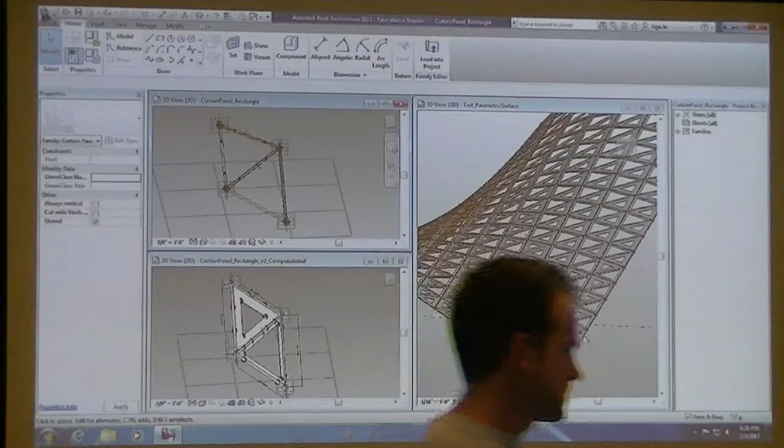The dots that we placed on one of the triangles. Jeremy, that was it. It's working.

That's always the case - if you get any kind of error, it has to do with the snap. I thought I had more balls there. Yeah, that one was 64 is what I can get to.

Did you get it then? Cool, change some, right, it looks cool. And there's 6 of them. How do you change the grid spacing for it to work? I didn't know that - you can just select it and do it.

Yeah, some of them occasionally. Honestly, my no-cuts issue, maybe that was it. Some of these curves are really tight too, so that might be an issue. I might try to do more segments on it, so they're smaller, so we can follow the curve a little bit better.

It's perfection, this is what I'm doing. This is my thesis right there. But you guys are working on a lot of those. Yeah, it works, this one is.

Yeah, you see that? I'm lovely, yeah it is. I don't feel like I'm being any more weird than usual. Ben, am I being any more strange than I normally am? He shook his head no. Maybe I'm just in a funky mood today. Figure it out, totally different.

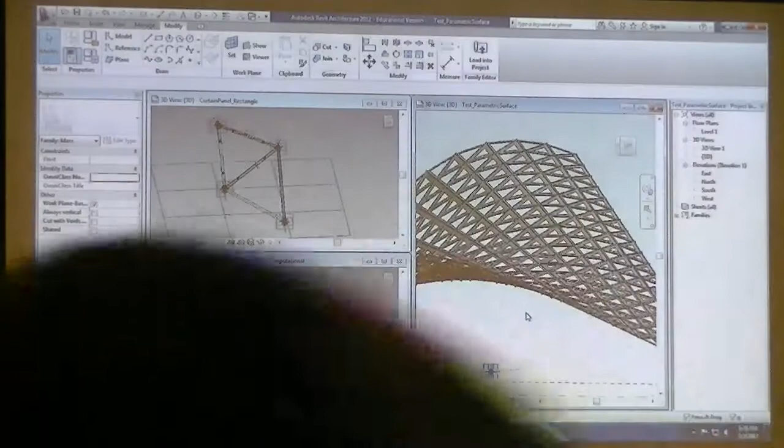That's just the reaction I want. Thank you, Ben.

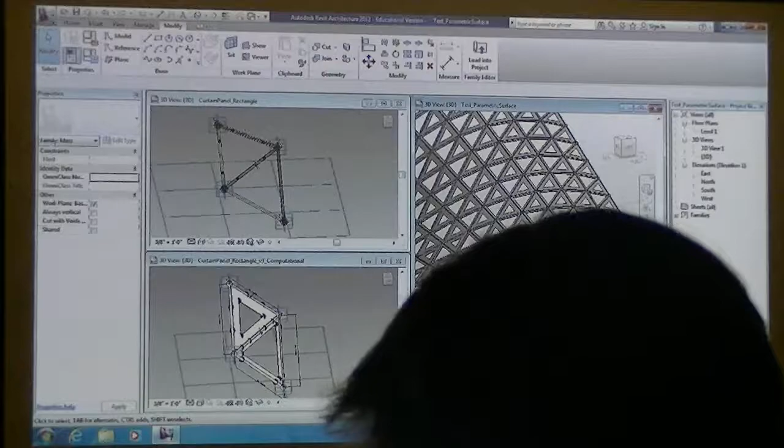Yeah, you want to drag this off to the side so you can see it a little bit better. I'm used to my computer. So, was it this good? Oh yeah, we had that bigger - that's why I can't see it. There we go, you got it right there. Okay, just making sure it's on.

Okay, so today we're going to continue where we left off. Last time we were working on the diagrid - that's basically our rectangle with the intersecting diagonal, and then we've got these 2 triangular pieces. What we're going to be doing is continuing the idea of how to create an offset, and then actually applying some voids into this form.

Eventually, we may not get to it today, but definitely next class we'll get into how within our parameters and formulas, we can actually impose some conditional statements, such as if something's true, do this particular calculation, if it's false, then return some other number.

So if you look at this surface off to the right, I've got a lot of variation in it - maybe not as much as I'd like at this moment, but not every panel is exactly the same. Every single panel is changing depending on a conditional statement and then a particular formula. So for now, I'm going to close out of those guys.

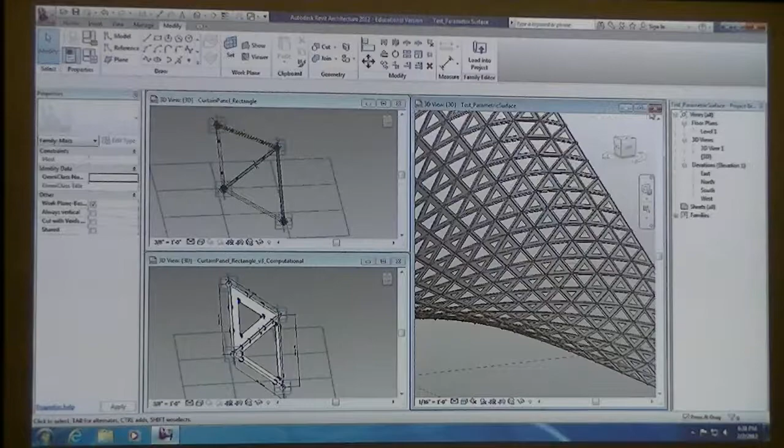We want to make sure we're in our form where we left off. You'll notice that when you loaded your component back up, like with your homework assignment, we hid a bunch of items at the very end to place these dots and get them to move up and down. But when you exit out and load your file back up, everything shows up again.

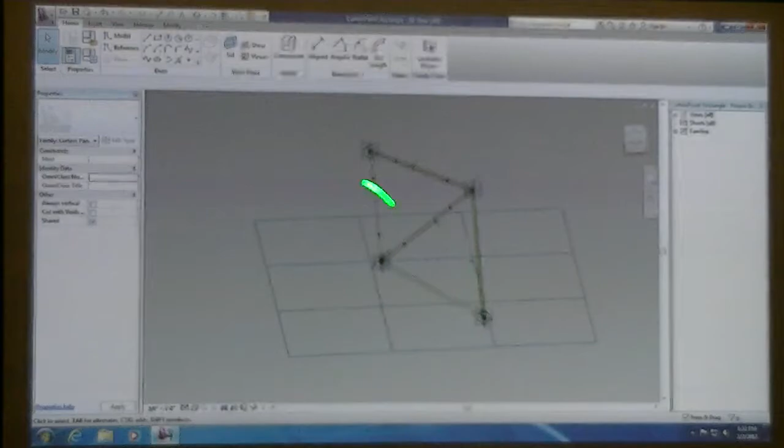That's because we were using just temporary hides, using the sunglasses down below. When we get into the project environment, which we'll be getting into next week, we can do permanent hides. But when you're working in a family environment, everything's going to be temporary, which means when you exit out, everything will come back to view when you load it back up.

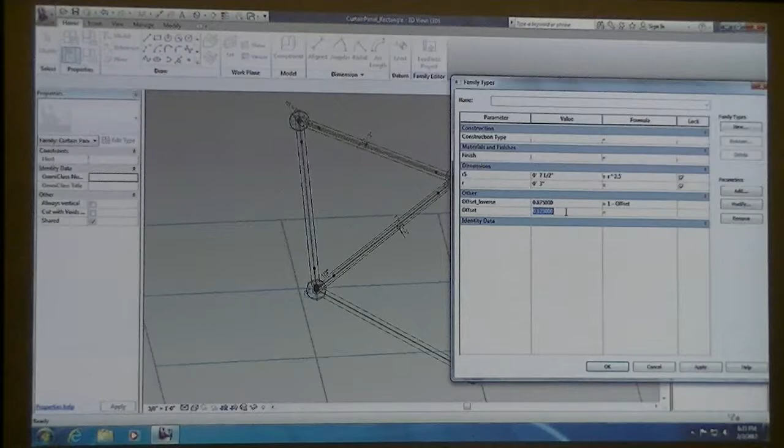You should have an element that looks like this. You've got your pipe rails, and then our spheres on each of the corners. The last thing we were doing is we had parameters set for an offset and offset inverse that had to deal with the normalized position of all of these points. So if I change my offset from right now 0.25 to 0.125, all of the points should move towards the end. Does everyone have that? Doesn't matter what the form or whatever your value is, just as long as your points are moving.

What we're going to do right now is select everything and select your filter. Once this filter dialog box comes up, I'm going to hit the button that says check none. And then I'm going to go back and check. I want to see adaptive points, dimensions, reference lines, and reference points. And hit apply and OK.

Once you have that, basically you've only selected those items. I'm going to go down to the temporary hide and isolate, and I'm going to select isolate element. So basically all we're looking at again is our reference lines and our points.

Everyone, where do we find the filter thing again? If you select everything, you get the filter button that pops up. The filter is for selection purposes only. So it's basically saying, this is all the items in the category that you've selected. And now you can deselect, or I always like to just do check none and then selectively add the items I want to see. I need adaptive points, dimensions, reference lines, and points.

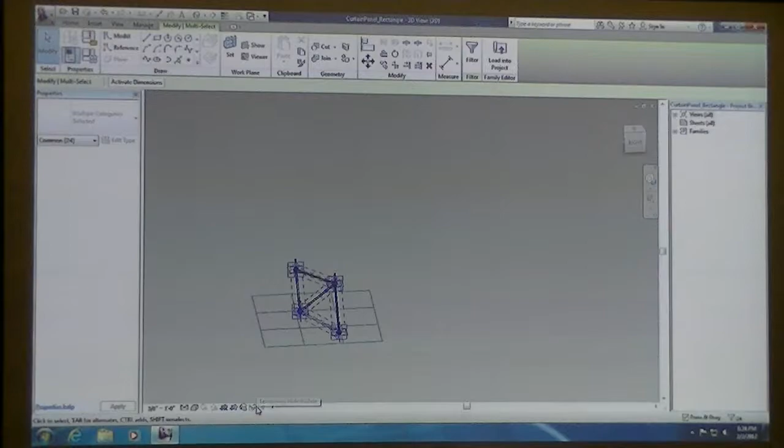Once you exit out of that, you do your temporary hide isolate, and I want to isolate the elements, so that basically I'm getting rid of all the other items I haven't selected.

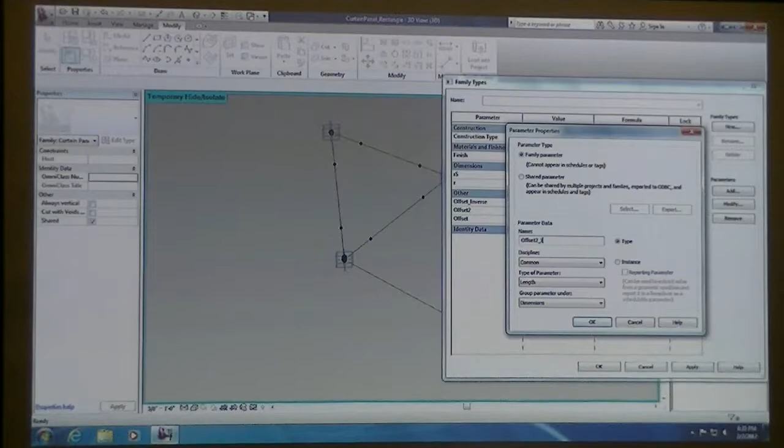What I'd like to do is on the next triangle, so we've got this top piece, down below we're going to add another set of points that are going to be equal to another offset, because I eventually want these two offsets to be different. So add a parameter called offset 2, and remember it needs to be a number. And then again we'll need an offset 2 inverse, and that will have to be a number as well.

You can by default just set the offset to some number like 0.4. You want it to be a little bit different than the original offset. And our offset 2 inverse needs to have the same formula, the 1 minus, but this time it'll be offset 2.

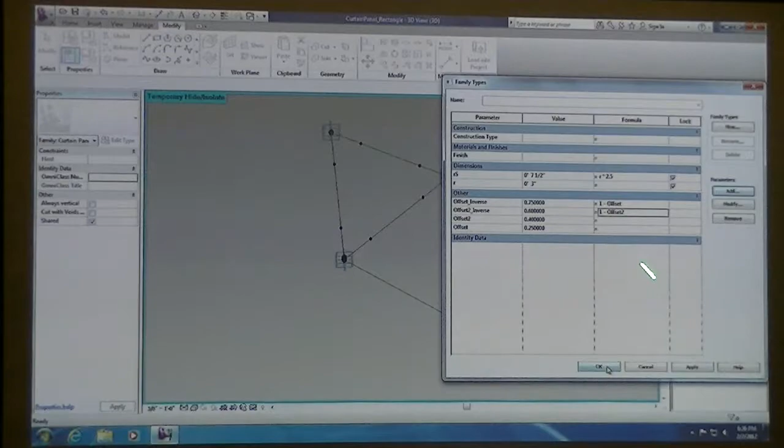Everyone got that? We're getting there? Okay.

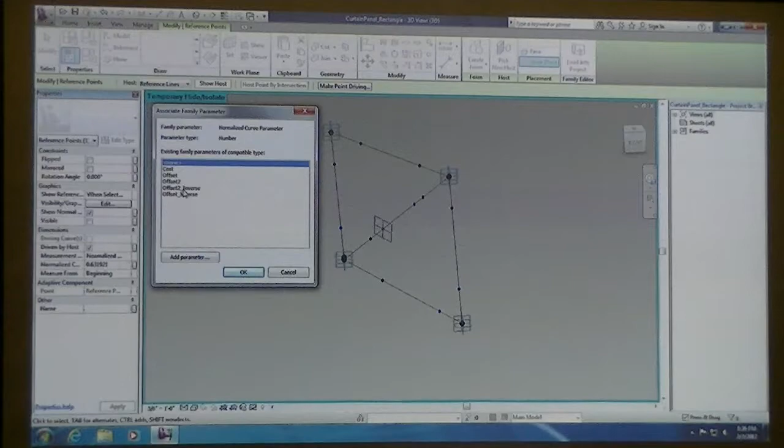Now I'm going to select my point element, and again, I just need 2 points around each of these corner adaptive points. Then when you select one of those points, look at your normalized curve parameter and associate it with the new offsets that we just created. So in this case, this one's greater than 0.5, so that's going to be my offset inverse. This other one should be the offset because it's less than 0.5. Again, do that for each of your points that you just placed.

While you guys are catching up, I'm going to do a save as. Just call this... Every time you do something good, you want to hit save.

Let me know if you guys are there or not.

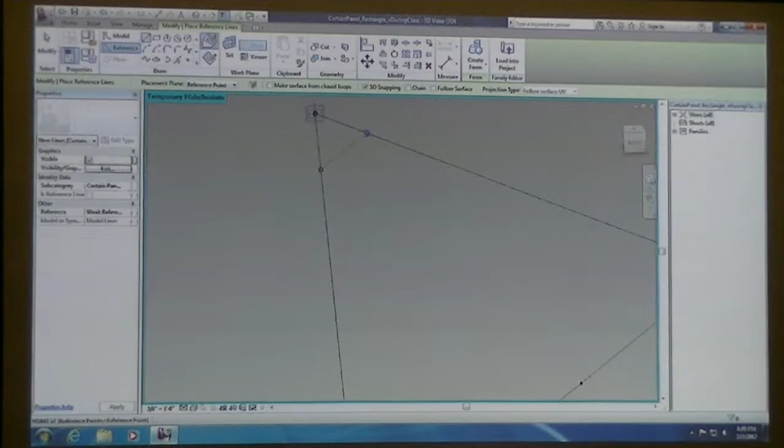Essentially, each of these points that are near the end, we want to snap and draw a line to each one of them. So I've got that corner, I'll do the same thing. You want to make sure you're snapping to the points that are associated with the offsets, and then the ones associated with offset 2. I'm going to do that on both triangles, and make sure you're getting that point snap.

So you should have this web that looks like this. You might get an error on one that says the line is slightly off axis. Don't worry about it, hit okay. Basically that means you're slightly off orthogonal, and it's just warning you. I don't know why it gives you that warning.

That's highlighting a plane when I'm trying to connect the points, like it's not allowing me to snap. Do you have your 3D snapping on? That's what it is, yep. You should have two.

So if you've been able to get that to snap together, go ahead and test it out by loading up your parameters again and changing the numbers and hitting apply. Make sure that your points and your lines are moving up and down the triangle, and I'm always keeping them slightly offset from one another.

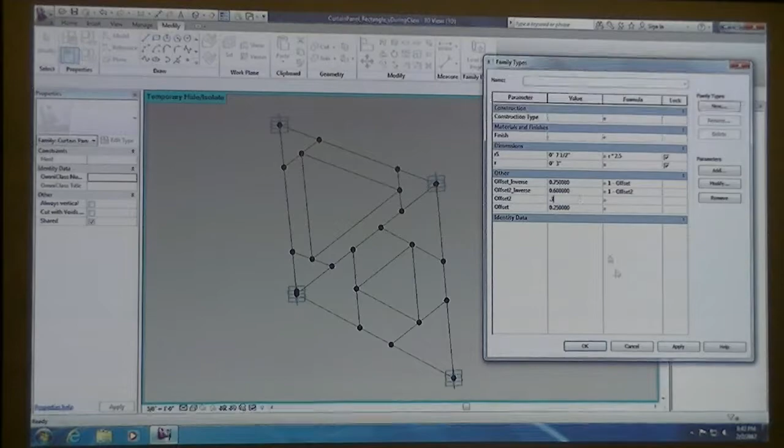And again, if you've done that, go ahead and test out to make sure that your inscribed triangle adjusts with the change of the offset parameters. Everyone got that?

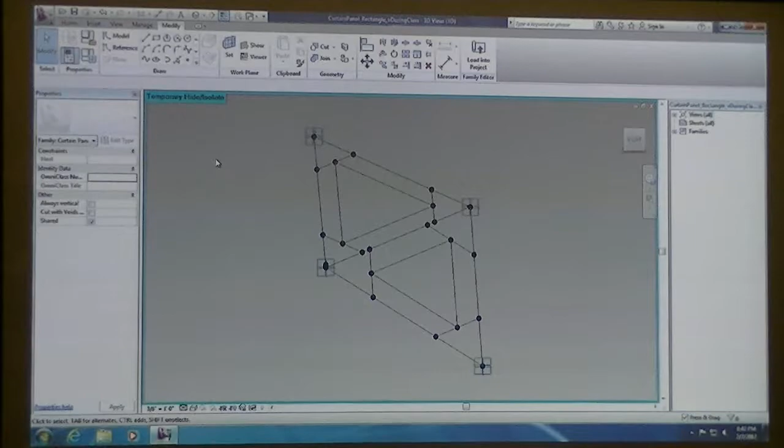Now what we're basically doing is creating a solid surface out of each of the triangles and then cutting a hole through it. Since we have all these reference lines, our void hole will actually adjust depending on our offset.

But there's a couple different tricks that we need to do for when we start working with voids. We always have to ensure that our void is going to cut through the solid. One thing I'm going to do is create a couple different parameters here. One's going to be called thickness, which will be the thickness of the actual solid surface.

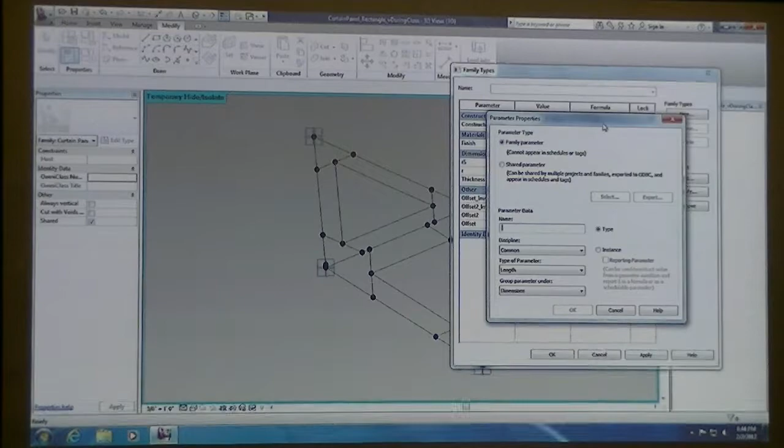The next parameter will be... the length parameter? Yeah, that'll be length. And then the next parameter, which will also be a length, will be something like void offset.

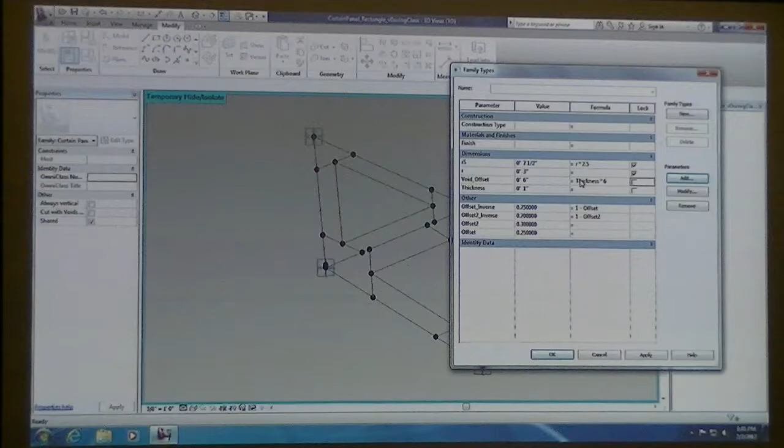I'm just going to give the thickness parameter a 1-inch number. And then my void offset is actually going to be a formula, which will be thickness, times 6 for now. I'll explain what that means in a minute. Everyone get those set?

Okay, so now to make the solids for each of the triangles, if we select the first triangle and then control-click the last leg at the very middle there, I'm going to select Create Form, Solid Form, and when your little thumbnail pictures pop up, pick the one that looks like it's extruding.

What was that error you got, Brian? So I was unable to do it. Don't select the interior, just the exterior triangle.

We're just making a solid, so select the exterior of one triangle, control and select the other leg to close the shape, and then say Solid Form, making sure you're selecting the one that looks like it's extruded.

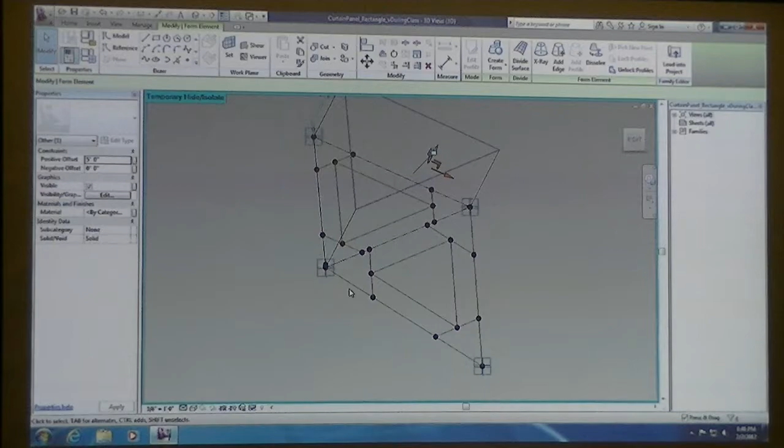Now before you exit out of this portion where we've just made the extrusion, if you look over to the left, you have another set of parameters associated with this extruded form. It says positive offset and negative offset. We can choose those buttons and then click on the thickness parameter for the positive and do the same thing for the negative.

Basically what we're doing is extruding this form 1 inch up and 1 inch down from the reference line.

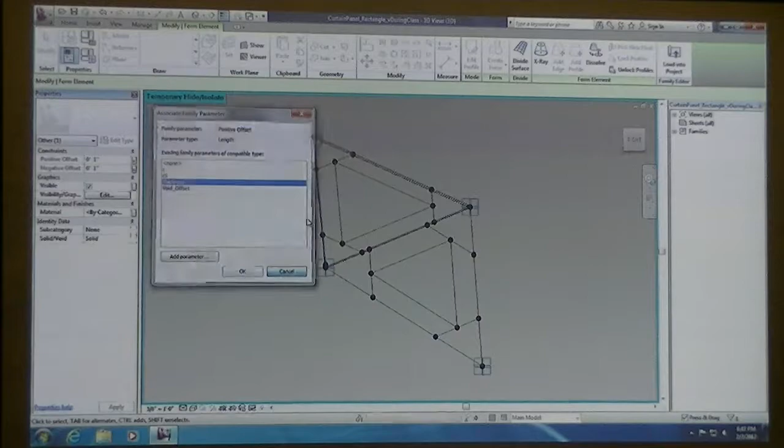Okay, so make sure, if you don't see that, you probably need to tab over until you can select your form element, the extruded element. Once you do that, you should get the positive offset and negative offset properties that you can set equal to thickness.

What did you extrude before that? I think that's the part I missed then. So you don't have an extrusion? No, okay.

Select the outside edges of this one triangle, then control-select this other part, create form, and make sure you select the icon that shows it's extruding.

Before you exit out of that, you can hit the positive thickness and negative thickness.

We're going to do that to the form on the bottom as well, so repeat the same exact steps.

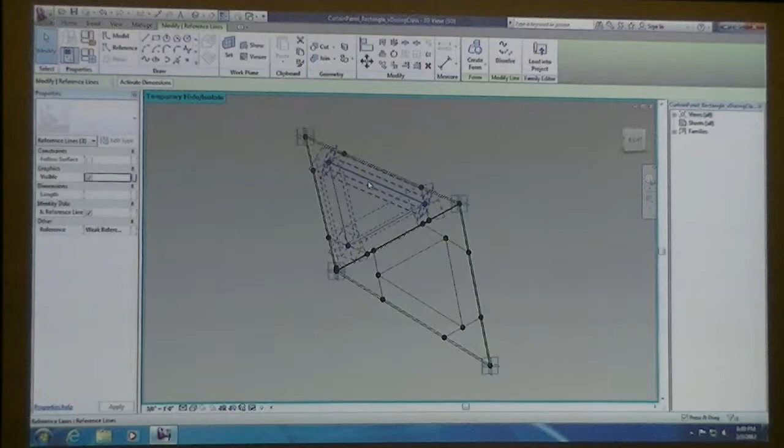This time when you do create form, use the pull down arrow and make sure you're selecting the void form, and again pick the one on the left, this little thumbnail.

Before you exit out, you have a positive offset and negative offset again. This time we'll make those equal to the void offset on both directions.

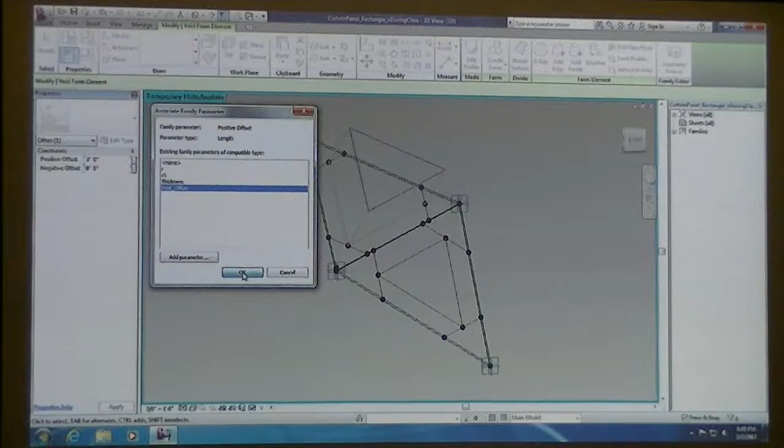So basically what we're doing is ensuring that our void, because we typed in that formula, thickness times 6, our void offset is always going to be greater than whatever our surface thickness is.

Because if you were to have a particular extreme bending of your form, let's say I only do thickness times 2 for now. That probably will still work.

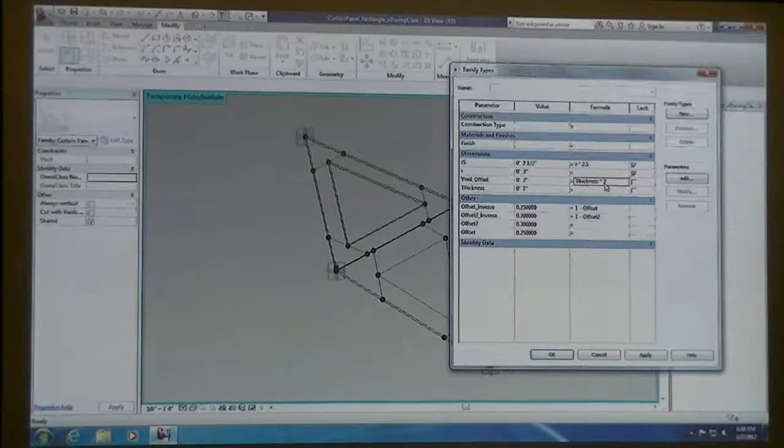Why would that give me the positive and negative option whenever I click void form?

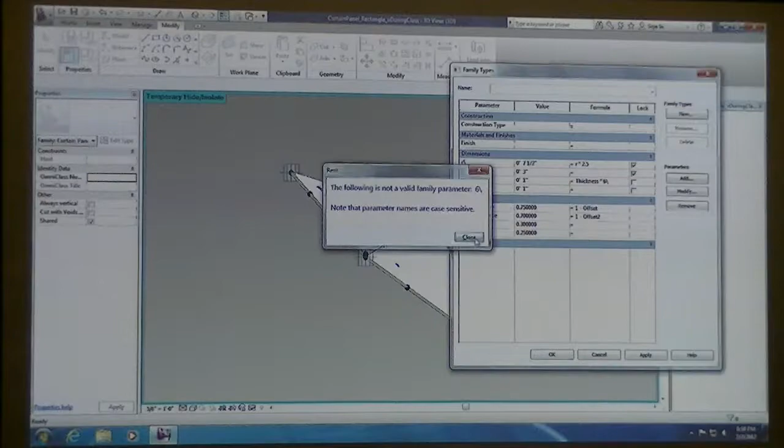You'll want to do the same thing with the other element. So select your triangle, the inscribed triangle, make sure all three are selected, and then create form, making sure you're doing a void form.

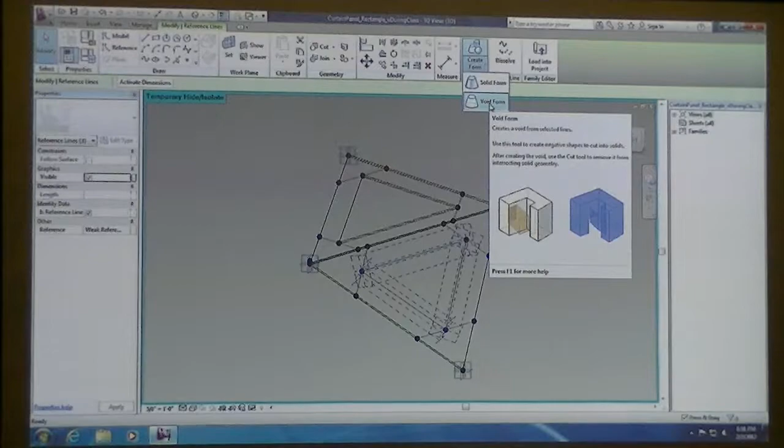You should get the two icons down at the bottom or somewhere on the screen. Make sure you pick the one on the left. Then before you exit, you should have a positive offset and negative.

It doesn't give me the constraints. Mine doesn't give a dimension line that I can set. It's not giving you the constraints? No. Hold on, who's not getting that to pop up on their screen?

Change those to... you drew those with model lines. If you're getting that error, that inscribed triangle needs to be drawn with the reference lines. If you draw it with model lines, you're not going to get those offsets.

So far everything that we've done has basically been with the reference lines, except for when we did the spheres — those were actual models.

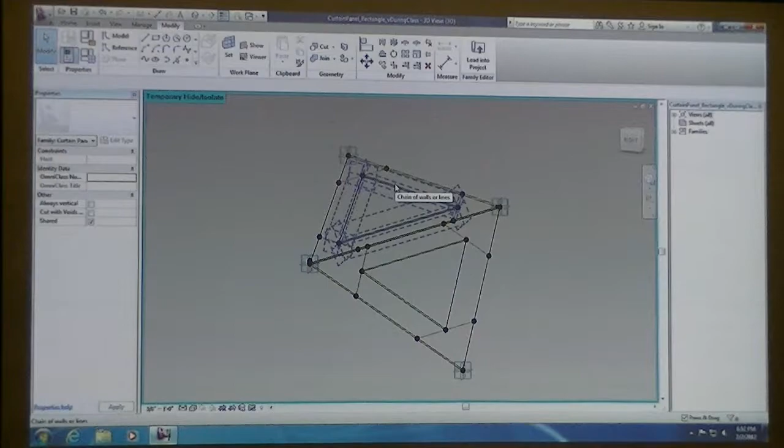The points are just normal, right, though, they're not reference points? Points, basically, no matter whenever you place a point element, it's always going to be a reference. Okay, I guess, yeah, that's what I... yeah, see.

Every time I'm doing it, for some reason these other forms are popping up on my triangle, like there's a twin cylinder on there and a bigger circle around that. Alright, hold on.

If you happen to have a set of lines that might be model lines, for instance, if I draw a model line off to the side here — a model line will be, it's hard to see on the screen, up on the board here, but if you look on your screen, a model line will show up as black, and when you hover over it, it'll say model lines. Your reference lines will be green, and they'll show up as reference lines when you hover over it, and you also get these kind of dashed planes that are associated with it.

If you select any of those lines, if you look in the properties, down at the very bottom, there's identity data, and it says 'is reference line,' and there's a box that isn't checked. If you want to make this a model line into a reference line, you could just check it, and then it's changed from a model to a reference line, and then vice versa. If you don't want this to be a reference line, you uncheck the box.

So instead of recreating the wheel if you happen to mess up by selecting the wrong model or reference line, just keep that in mind. Alright, so you got... not sure what that selected.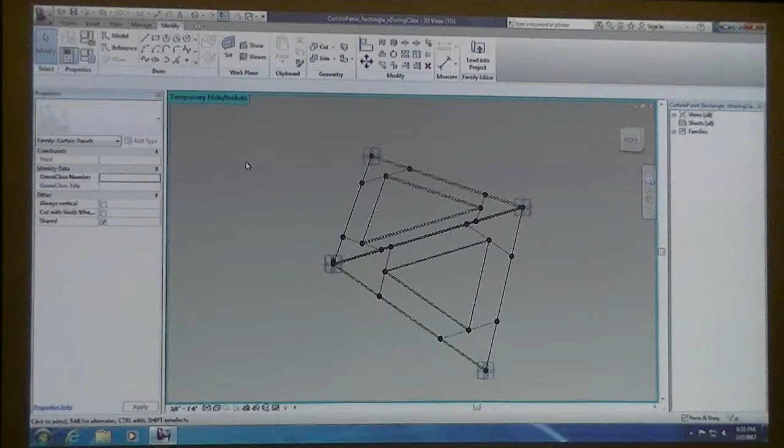Okay, so when you're done, you should have your two voids, and when you test out your parameters, of course your void should also adjust.

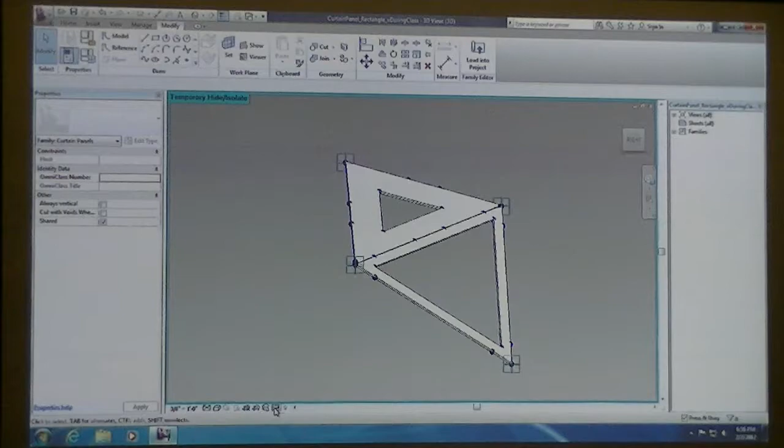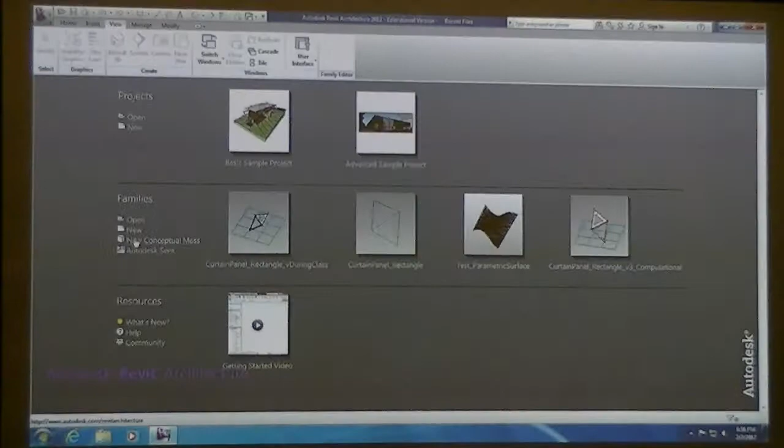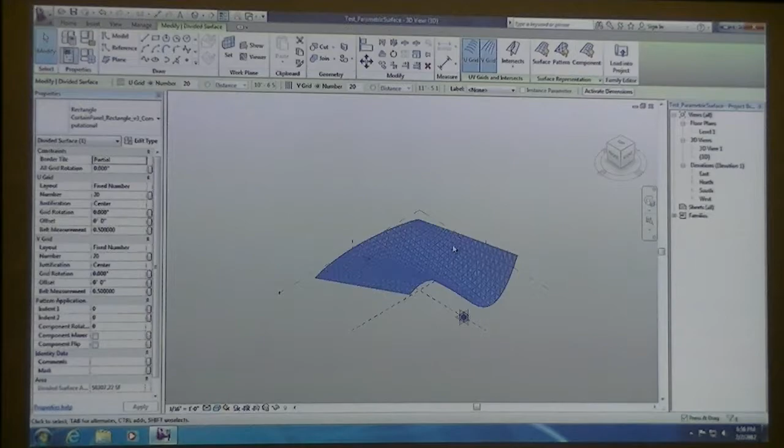Now if you can load up a new conceptual mass, or if you have one handy, actually going to load up. So if you get some kind of a complex form, something that looks like paper, go ahead and load up your panel that we just made and apply it to a test surface.

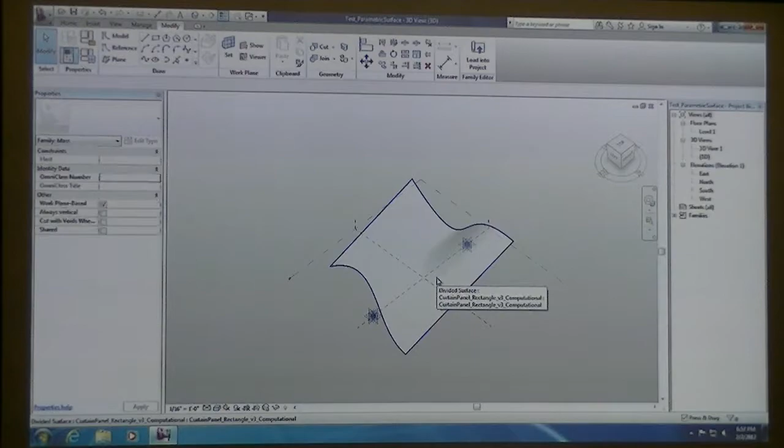You'll probably have to think for a minute. If you happen to get any kind of errors that say cannot make form, and it's asking you to delete some of your components, that is pretty much 99% of the time a result of not snapping your reference lines to reference points and making sure that everything's connected. If that's the case and you keep getting an error message, basically you've got something that's not snapped.

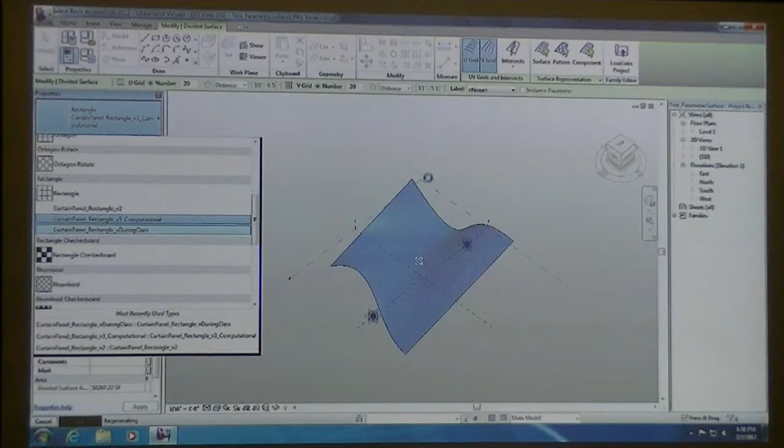And it's taking a little while here to generate. Are you sure it is? Or is this something that you can move to? Why is it out of the box? Out of the box, what do you mean? Like it's past the line. Maybe if you turn it, maybe it's not. Maybe it dips down or something there.

But if you go ahead and move some of these points up and down, like the end points, the drag. Well, you can just see what the line is. So I think that's the problem, just lift it. There you go. Okay, now you can make a surface and the void is doing something different. Mine's so jagged. That's why.

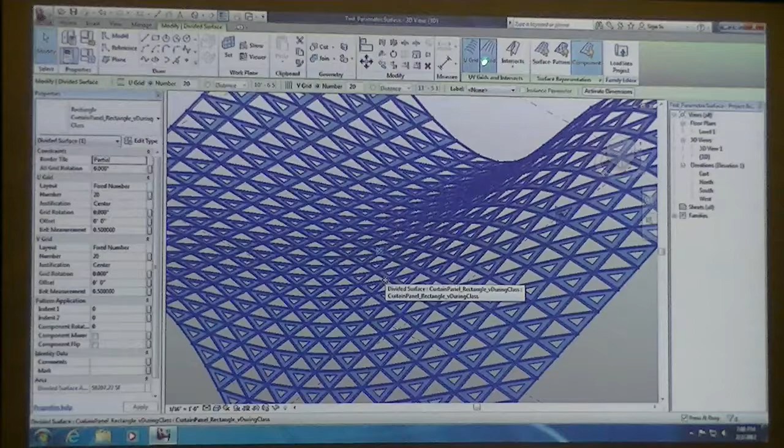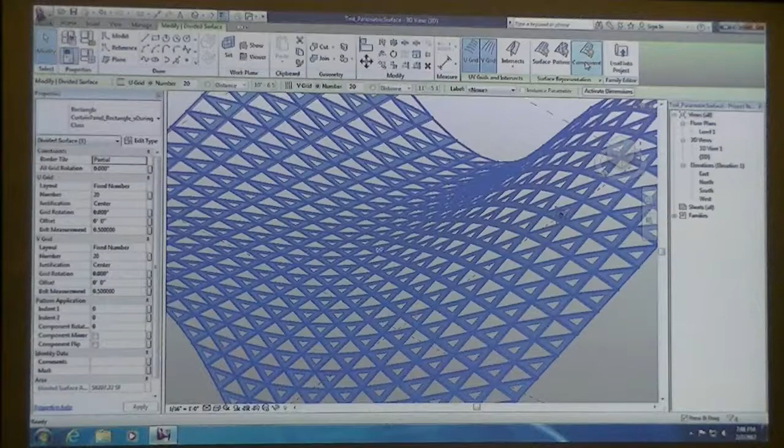So then obviously to adjust the scale of this, you would just change your divisions, your different rows when you select your surface. Anytime you select a surface, you get these tools up at the top, where automatically it has the component highlighted. But if you don't want to see the components anymore, you can click that and that'll turn off the component. Then you can turn on the surface so you can see all your divisions. So sometimes you have to toggle those on and off just to be able to select different things.

If you turn on the pattern, you should just get a solid form.

And anytime you change your U's and V's, you're going to see your pinwheel regenerate, because it has to regenerate your whole entire form every single time you make an adjustment.

I should cancel that. Is it easier to just delete the pattern and then change the grid and then mirror it? Yeah, if you want to really play around with your grid and then your form, it's best to delete your pattern off of the surface and then adjust your form and reapply it.

Your pattern, as long as it works on every little component or part of your surface—if you go back and change your surface, let's say you have those 5 or 6 curves we initially started out with in the semester, the different curve types, and if you were to change your end curves to something different and your form changes, then you can reapply your divisions. Actually, you can keep your divisions how they are, and then just reapply your pattern to it.

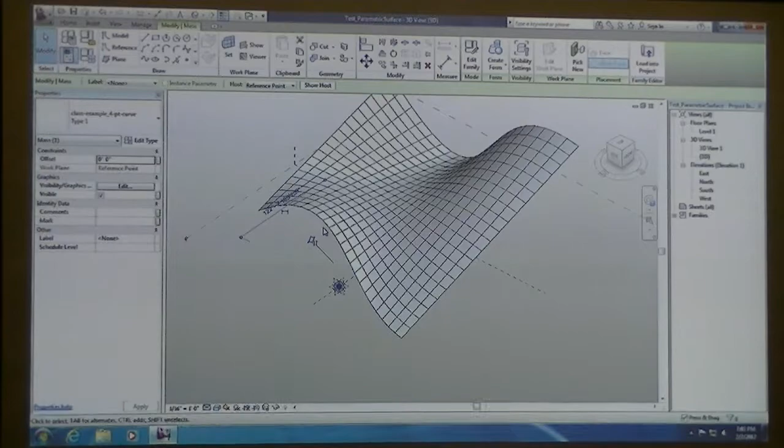So actually, this test surface that I made was made out of the different curve types from one of the earlier assignments, and so I can make some adjustments.

I'm not going to do this now because it'll take a little bit of time, but I can come back here after making all my adjustments and then select that curtain wall panel. That's the best way if you want to start manipulating your form and maneuvering it around, because every little change you make, it'll have to regenerate.

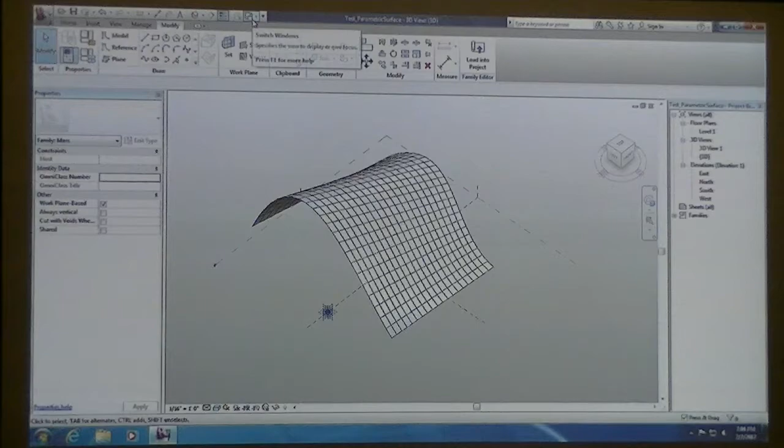Now, similar to how you can change the pattern on the form, can you change the type of curtain panel after the fact? Like, could you change it to a hexagon in the one we've been working on now, and then load that into the hexagon pattern? Does that make sense? Yeah, so...

Basically once you have a pattern applied—and of course I took mine off, so it'll take a minute to come back on—but if you individually hover over, you may have to use the tab button. You can actually select individual curtain panels, and when you select them, if you have more than one curtain panel loaded into your project, you could go down to the pull-down menu and select a different curtain panel and basically switch out the type.

In that one spot? In that one spot. So that's a way, if you happen to have it, you could actually make 2 or 3 different types of these diagrids, with different adjustments already with the offsets.

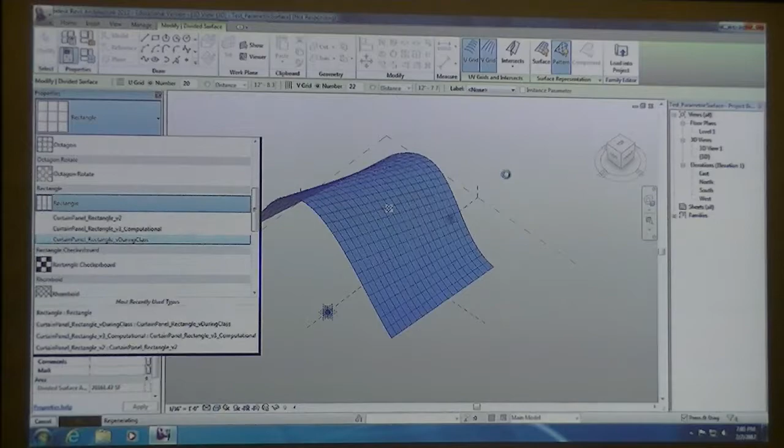And then once you've applied it, you can actually go in and start selecting individual panels and saying that it's curtain panel type 1, type 2, or type 3, having your various offsets. That'd be kind of a manual way of getting some variation into your surface.

Do you have to have a pattern on that? You have to have your component showing.

And then tab over an individual component should allow you to select that individual square. Oh, it's still—yeah, it does. I'm still at 1%. So if I select it, it's failing. My computer, catch up here.

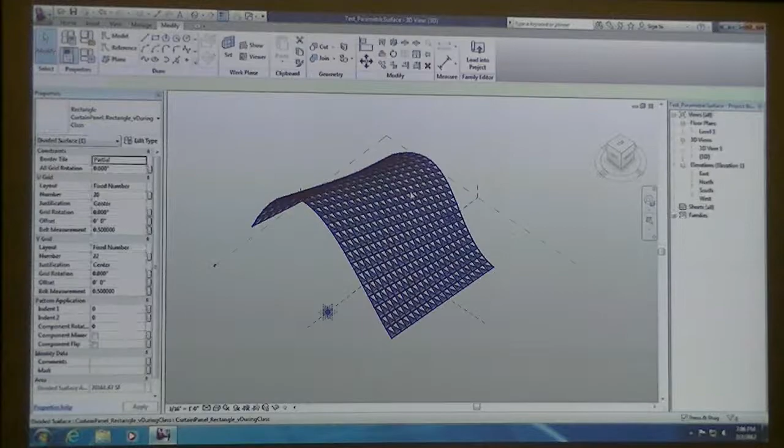So you see how when I hover over, it's selecting everything, but if I tab, I can select an individual curtain panel. And then if I have other ones loaded into your project, you can go ahead and select it and it will change it out.

Everyone get that to work out?

We're going to continue with this form a little bit more, and I'm going to introduce what's known as instance reporting parameters. So far we've been working with type parameters, basically every time we've done any of our components in class and also with the homework. If you recall, at one time we went over what an instance parameter is. Essentially, if you change these to be an instance parameter, every time you load it into a project, each individual panel has its own instance set of parameters that you could change.

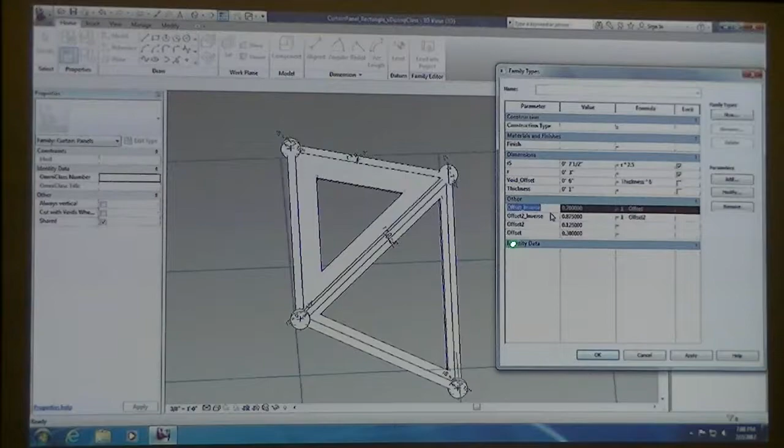So before we make any kind of reporting parameters, I'm going to first change all of our offsets to be an instance parameter. All we have to do is select one of the parameters, hit modify, and change it from type to instance, and hit OK. You should get a little default phrase within parentheses, which tells you that you've made that into an instance parameter. Go ahead and do that for all of them.

Jeremy, I'm getting error 4. What's the error say? Instance parameters can't be used in type parameters. So change your formula ones first, and then your other one, and that should resolve it. Basically, what that error is saying is: if we've changed only the offset to be an instance parameter and left the other ones as type, and we try to exit out, it'll give an error message because we've got a formula that's trying to reference an instance parameter and a type, and those two can't interchange.

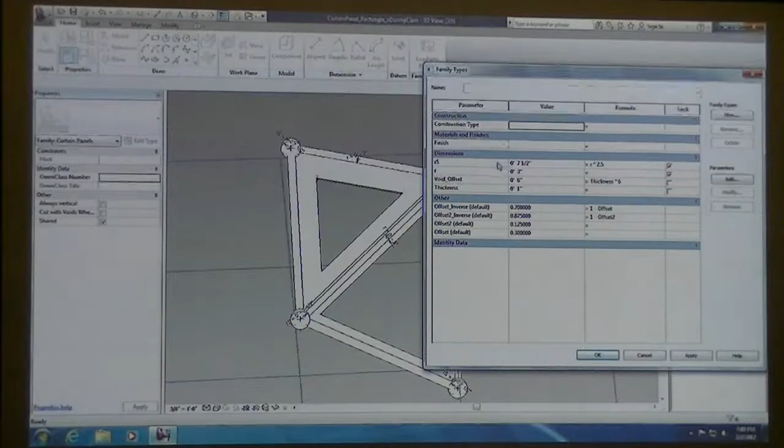Now that you have changed all these to instances, hit OK. I'm going to hit save, and go ahead and load that back into the project and overwrite it. This can't take this long every time. Seems like everyone else has a faster computer.

Where I'm going next here is, because we've made instance parameters, you can individually select each one of these curtain panels, and off to the left you should have a set of properties that allows you to change your offset for each individual piece. So you could go around and individually select all of your curtain panels and manually change the numbers if you want to get some more variation within your form. As I said, Revit currently doesn't have a random number formula. Hopefully that comes into play pretty soon, because that would make getting variation a lot easier in a lot of our forms.

I remember the first class you showed us an Ecotect model, and part of the building is red because of the exposure to the sun and part is blue. Is that where you change it? Yeah, basically we can do something randomized to a certain degree, and what that was - it used parameters that were set to the Ecotect thermal analysis of the building. So it was shading it blue or green or red or yellow. Someone had actually written a script - in Revit you can actually do scripting, we're not going to get to that in this class - but they wrote a script that translated that color information and brought the parameters into Revit, so that everything that was red had a value of 5 and everything blue maybe 1. That's how it got the variation. That'll be BIM methods part 2.

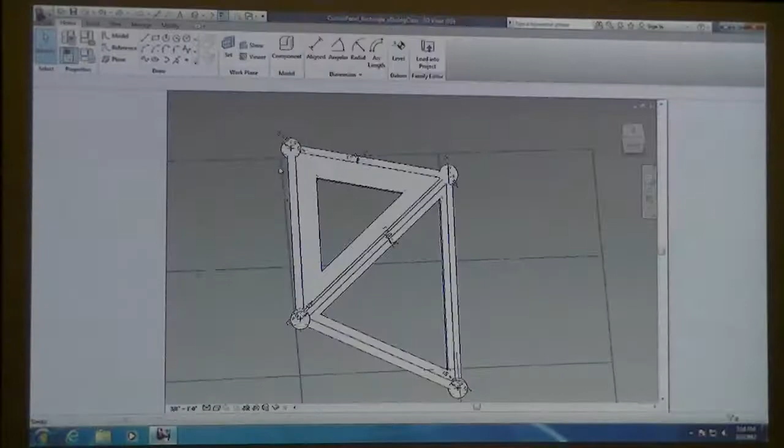So basically what an instance reporting parameter will do is report a set of information, and that's all it's going to do. I'm going to make a dimension that will report, whenever this panel is on a particular surface, what is the length of each of these legs. It will vary and be different, and that's why it has to be an instance reporting parameter. It has to be an instance.

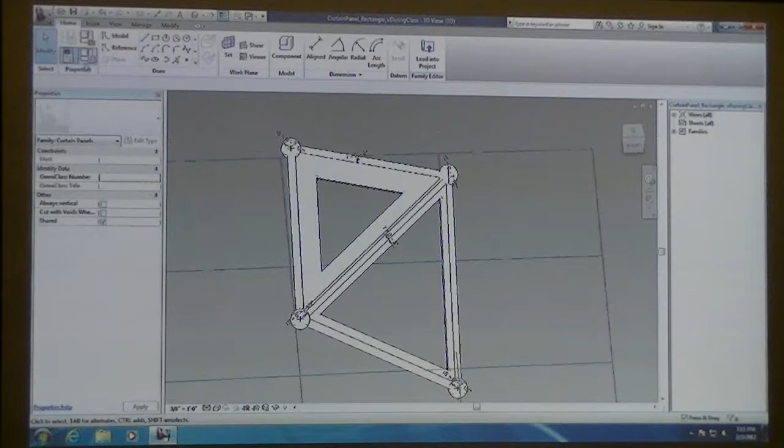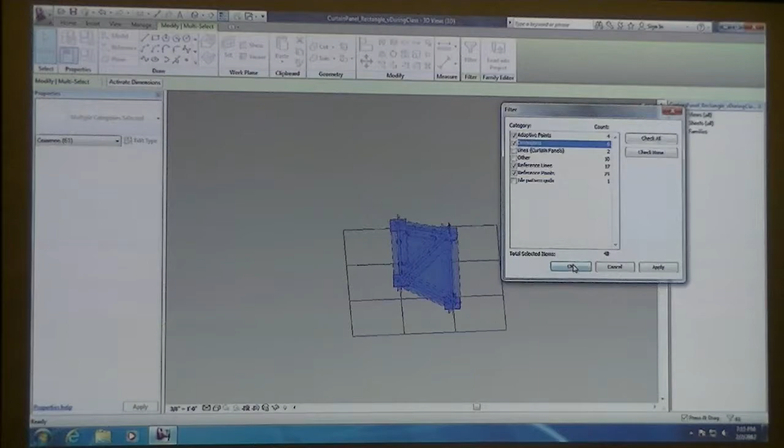What I'm going to do is select everything, turn on our filter option, let's check none, and this time we need our adaptive points, and we can do our reference lines, reference points, and dimensions. Pretty much the same thing we did last time. And then select isolate element.

Now everything, because of this object, is constantly changing and is never really orthogonal. When we start to set dimension strings to this form, we have to be aware of the plane we're going to associate it with. If we don't associate this correctly, when you bring it into your next element or test surface, you will get an error message every time.

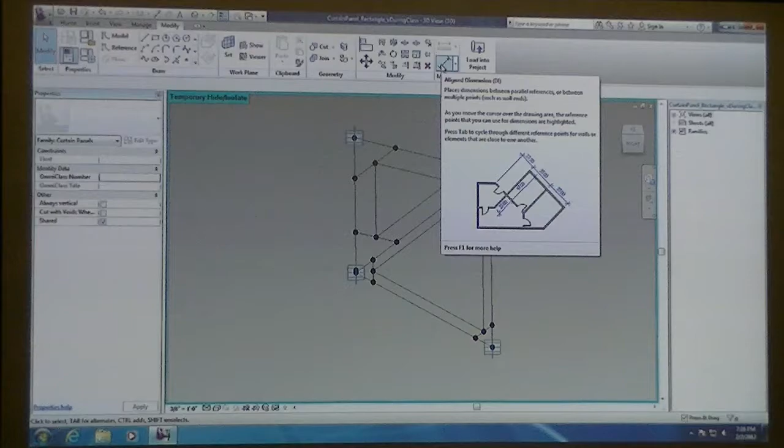So you can kind of see we've gone through a bit of a process. Every time you've done a set of components that are changing based on parameters, you want to load it into a test surface, test it out, and make sure it works. We know up until this point everybody's component has worked. We want to know that, because once we get to this next step, if we get an error message, we know it's something we just did and can go back to resolve it. If you try to do this all in one swoop and load it in, you get an error message.

As you've seen, Revit doesn't specifically tell you what's wrong. You will have to go back and figure out: did I do my reference planes and dimensions in the right location, did I snap to the right piece, what isn't working? So when you build any kind of component, you want to go through that process every time, this trial and error way of processing. This is very similar to what you'd do in programming, or even in Grasshopper with scripting. You always work through it this way to make sure what you're doing works before adding more complexity.

So let's go ahead and do our reporting parameters. I'm going to set up a couple more properties or parameter types. This time let's do 4 parameters, each one a length parameter. I'll call it T1A, for triangle 1, leg A. That's what that stands for. I'm going to make it an instance, and then check the box that says reporting.

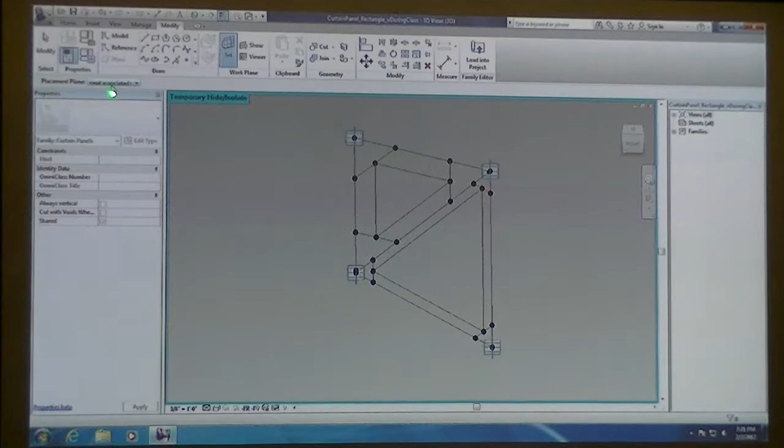So what I'm going to do is hit set, and then you should have a placement plane selection box. That's not what I want. I need to hit dimension first, sorry. Hit aligned dimension, and then select set. I guess it's not. What's going on? Hold on.

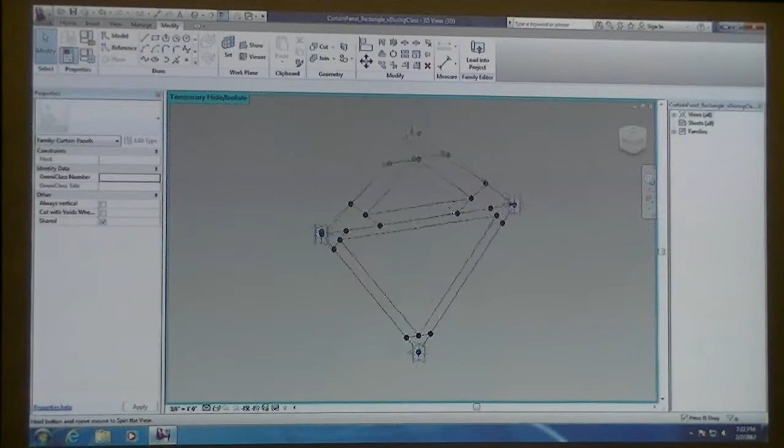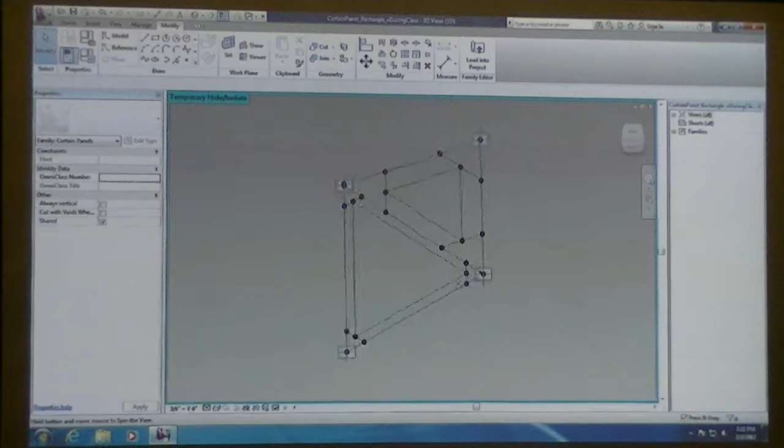Okay, if you rotate around a little bit, I had to do this, but you might be okay. If you hit the dimension, and we'll hit set plane, we just want to hover over one of the reference lines that are on the edge. Actually, I want to know which one's my triangle 1, so that should be my points that are associated with the first offset. So that's this triangle. I made it, you kind of make your offsets a little extreme. I know that this one is, because I made this a 0.4, this is going to be my triangle 1.

Okay, so now I'm going to set my dimension to one of those end lines, and then I'm going to make sure that I hover over an adaptive point. So when I hover over it, you should get the point that's highlighted, and it should say adaptive point. Click that, and go to the next one, and make sure you click on that adaptive point.

Looks like placement point instead of adaptive. I'm getting placement point instead of adaptive. You might have to tab over a couple times until you get adaptive. You probably have one of these placement points instead of that corner point. It says adaptive points, placement point 1. Is that the same? Adaptive point, yeah.

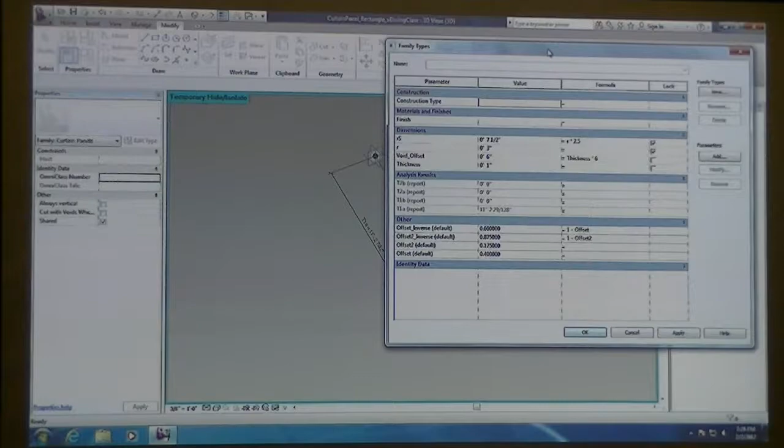You might want to test that by moving your point and make sure that your dimension and everything else changes. Mine was not. Oh my God, mine's not. Then you need to redo your dimension.

Make sure you're snapping to the adaptive point. This one allows me to get to a point and stuff, but this one is not letting me. If you can't get to a point, you need to rotate your view around. Sometimes your view might be stuck at a different angle.

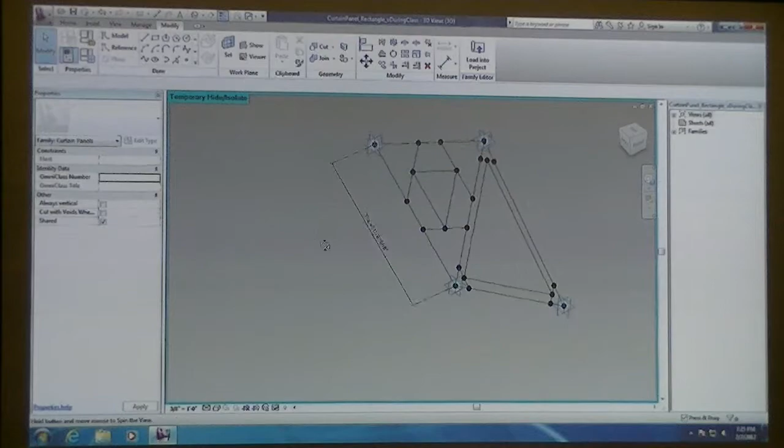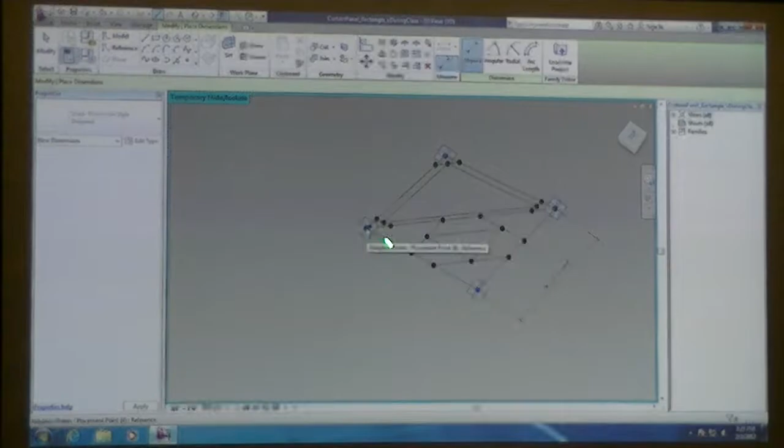So I'm going to do another one just to show you again. I'm going to take the other leg, and again I'm going to select my dimension, click on set, my work plane, and then pick the reference line, so it says adaptive points, placement point 1, reference. That's what you want to click. Next one, it says adaptive points, placement point 4, reference. Your numbers might be different.

And I'm going to set the next one to T2A. And again, if you move your points around, it should change. Who's still having trouble?

That's what I did. Just the line first. Now hit point, now go to the point. So you do it for each. There's the two sides. Thank you.

So we need to just start with the dimensions, and then set it to T, like one of the exterior lines, the green one. So you said line and point.

This is two. Okay, what's going on? You can see your stuff. I was clicking through and you weren't coming up.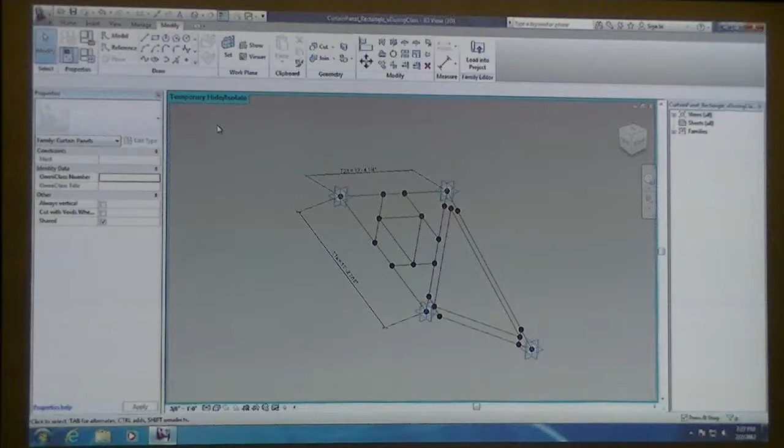Yep, so if you're having trouble trying to get your dimensions to work out, it's mainly probably due to the fact that you're not on the correct work plane, and it won't allow you to strike a dimension.

So some of you have probably already jumped ahead, but we're going to do the same thing on the bottom. It really doesn't matter which one's A or B, just as long as they're different.

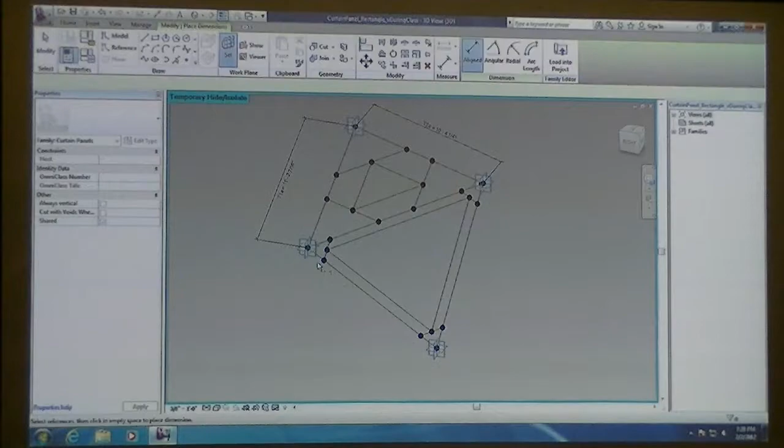Oops, this was supposed to be T1B.

So on one side of the triangle, you should have your T1A and T1B, and then on the other offset version, across the diagonal, you should have your T2A and T2B.

I'm going to hit save, and if we load this into the project and say overwrite the parameters, my computer will take a while. What's that error you keep getting, Brian?

Do all of your others seem to regenerate right away? How come my computer's taking so long? Mine takes forever. Huh? Mine takes forever.

Okay, maybe some of you already... conspiracy, yeah, it's the projector. Maybe next time I should do a smaller surface with like four components. That might be better. It's okay, it gives us time for questions.

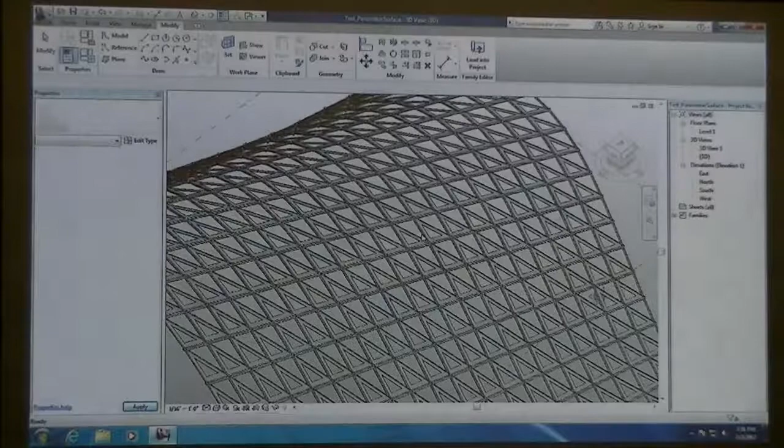The trouble is even with Rhino, right now they're trying to write Rhino for Mac and it still has a lot of bugs. It's because pretty much all these programs are written with some form of computer basic, like VBScript, and Macs completely took that out of their operating system because that's what people write viruses with. That's why you probably don't get as many viruses on a Mac. Most of that is written towards VBScript and scripting on the Windows side, but in consequence, a lot of programs have trouble translating over, so they have to basically rewrite the programs.

Okay, so I've got my reporting parameters to regenerate again. I'll go ahead and save that part of the project.

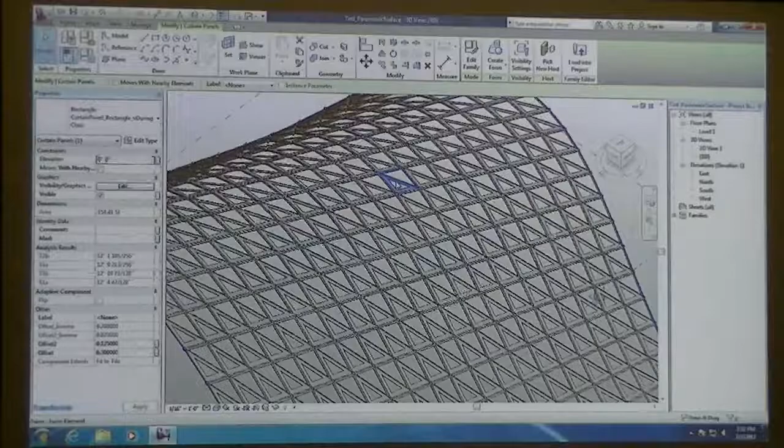Now you will notice that when you hover over an individual component and select it, you should see off to the left in your properties the reporting parameters that you just created. It should be reporting for that one particular element all the different lengths of the sides that we just dimensioned. So you can test it out by selecting a different component and making sure all those numbers change.

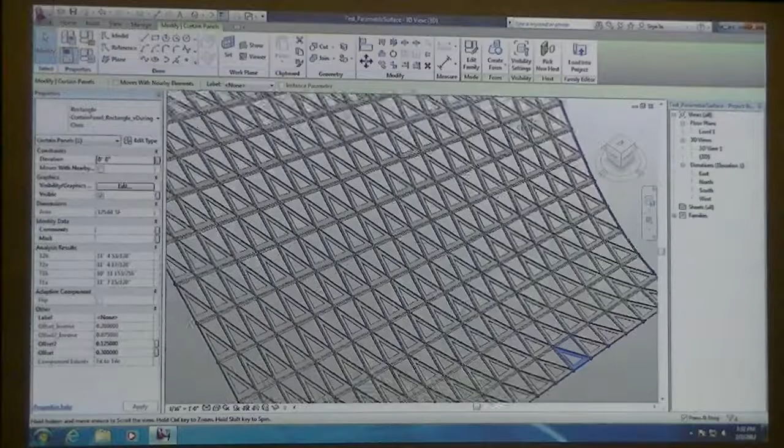If you're going around selecting every single component and it's all exactly the same number, most likely your dimensions haven't been snapped to the adaptive points, meaning those reporting dimensions are always reporting, let's say, 10 feet. If that's the situation, there's still a way to change it once we've set the dimensions.

In the forms I applied it to, if I select the individual one, it doesn't show those dimensions over here. You may not have made them— did you make them reporting? Yeah.

If you don't get the items reporting, listen up. If the parameters aren't reporting over here, it's possible you're not snapped to the adaptive components or the adaptive points, that will be one issue. The other issue could be that you've actually applied, like if you did a save as of your family and then loaded it into this particular surface, you probably have the old family name associated with it and just have to switch it out. So be aware of what you're naming things and where you're applying it.

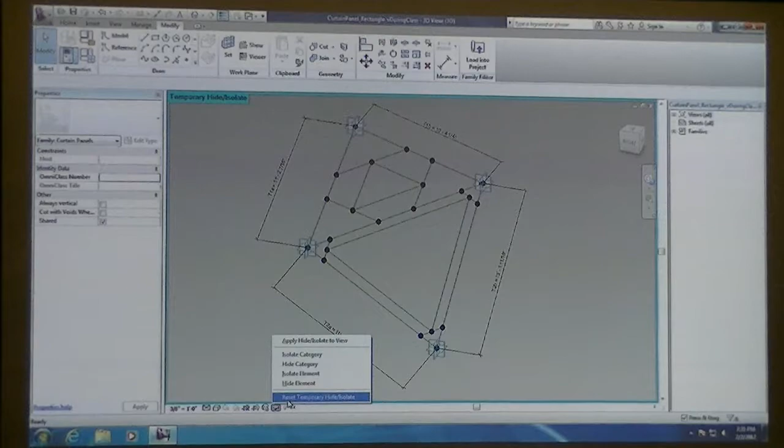Since we're getting close to the end of class, what we'll do is I'm going to reset. I'm back in my curtain panel, and I just unhid everything.

Basically, I want to use these reporting parameters to be associated with this offset value, so that when I get some kind of answer to a formula - let's say I'm going to find the area of a triangle - I've got my base times my height, divided by 2, and I get my area of my triangle. Each of those areas are always going to be different because we're always going to have different lengths for our height and our base.

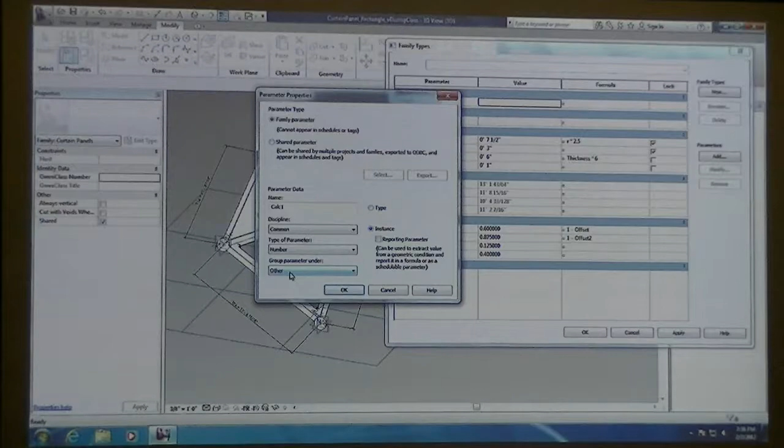I'm going to set up a couple more calculations. I'm just going to call these parameters calc1, and it has to be an instance. And this is going to be a number, because I want this eventually to be associated with my offset, and my offsets are a number, which is a decimal value between 0 and 1.

So I've got a calc1, and I'm going to do a calc2. It's a family parameter, number, and it's an instance. If you want to organize it, I might put this under constraints. I wish you could make your own categories, but you kind of have to choose from what's available in the list.

So we're going to do a pretty crazy formula. Is everyone ready? All right, I want to get the area of a triangle. So now we have to start going back to our trigonometry and geometry and all that fun stuff - base times height divided by 2.

So we have a base and a height, which is a T1A and a T1B. I'm going to put in parentheses - I named this one wrong, it should be calc 2. So for calc 1, in parentheses, I'm going to type in T1A times T1B, parentheses, divided by 2.

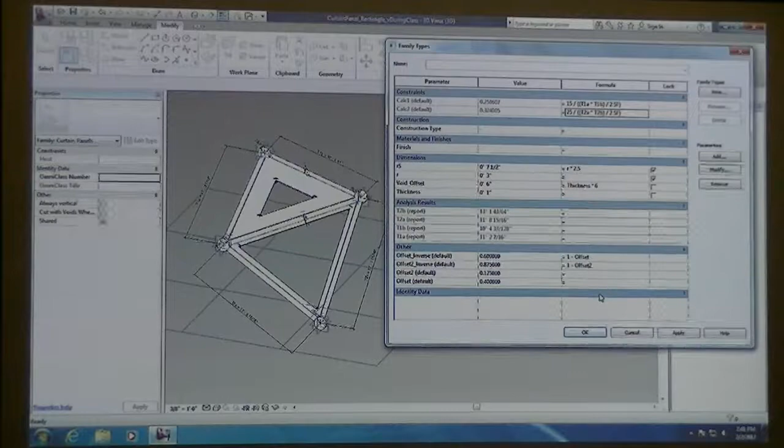Now under offset 1 and offset 2, I'm just going to make them equal to calc 1 and calc 2 in the formula.

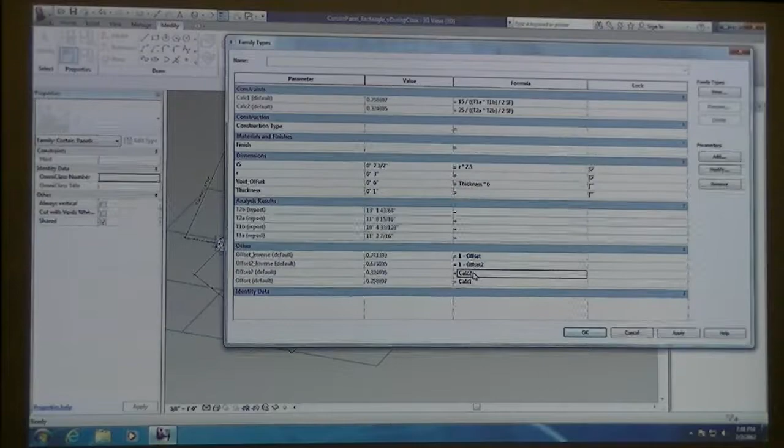I'm going to hit save. This will probably be the last time I can load this in right now, and then load it into your project. You should, if everything's been working up until this point, as long as you've typed in some formula similar to what we've gone over so far, get some variation from one curtain panel to another.

But it's going to be pretty slight because from one panel to the other, the numbers are only changing slightly, so obviously we're only going to see a slight variation. This will take probably till the end of class here.

What we'll do for the beginning of next class, I want to introduce - has everyone done any form of scripting or Grasshopper here? No. Everyone took like computational methods, right? No. Okay, so does anyone know what a conditional statement is?

The if-then statements. So for those of you that don't, what we're going to start with next class is we can start to write conditional statements into formulas. A conditional statement is you have to test some condition. So you're going to say if this condition is less than something or equals something or whatever you're testing, you're either going to get a true or a false associated with it. It'll be a yes or a no.